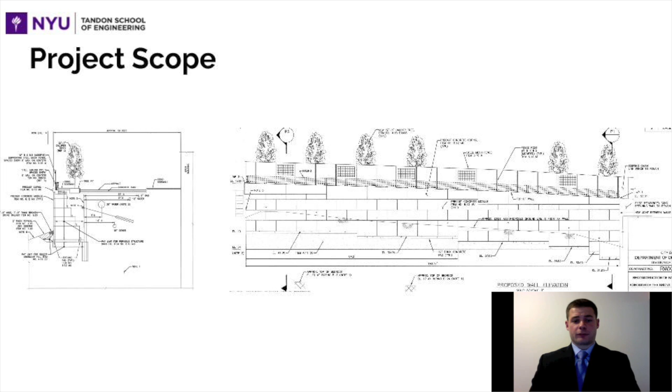To introduce our risk management plan, we'll be starting off with the project scope, led by Kevin, and the cost estimate and schedule, led by me, Gabriela. The project scope is to reconstruct a 148-foot retaining wall with an elevation ranging in height from roughly 10 foot to 18 foot. There will also be some construction of a water main, street lighting, and roadway and traffic work.

The location of the retaining wall will be between Bailey Avenue and Fort Independence Street in the borough of the Bronx, New York. The limits of the project are from Bailey Place, Bailey Avenue, and West 234th Street to approximately 150 feet north. The project is designed in a staged construction area to minimize disruption to existing utilities.

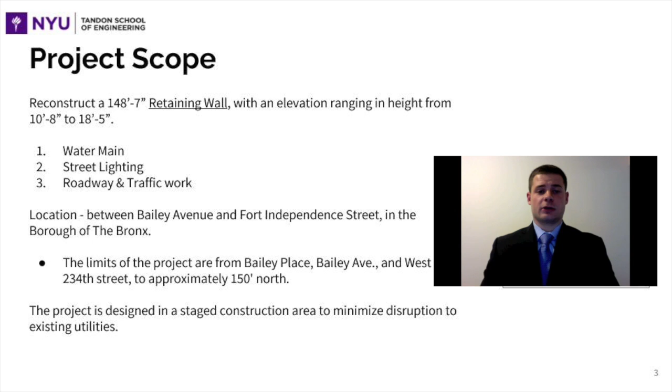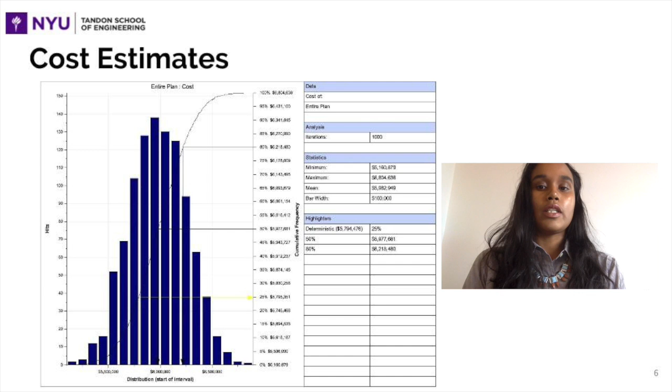This histogram shows the cost of the entire project after each iteration of risk analysis performed by the program, resulting in a few values of note. There is an 80% chance of the project being completed below $6.218 million, about 7% more than the design estimate. The program also generated a 50% chance of completing the project below $5.978 million, about 3% more than the design estimate.

The project start date is March 28, 2016, and is scheduled to complete on April 13, 2018. The project's total duration is initially computed to be 535 days, or approximately 18 months. Due to one task, tree planting and related work, having a start date fixed to the beginning of spring, the actual span of the project would be 746 days, or about 24 months. This also causes all other tasks to have float leading up to this one, and makes it the critical path.

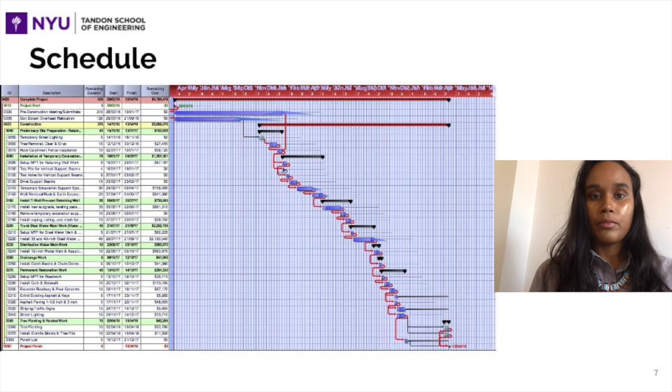This diagram also presents some notable results. There is an 80% chance of the project being completed under 774 days, about 4% more than estimated. The program also generated a 50% chance of the project being completed in under 753 days, about 1% more than estimated.

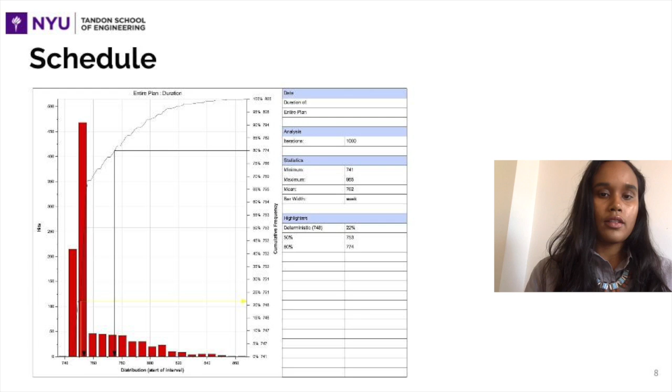The next area we're going to talk about is the risk management procedure. Within the risk management procedure, it consists of the risk identification, risk analysis, qualitative risk analysis, and quantitative risk analysis. Thanks, Kevin. The first step in the risk management procedure, risk identification, allows us as risk analysts to proactively take a look at the risks involved in the project.

Influence diagrams are a visual representation between our project's risks and allow us to get a better understanding of the relationship between the risks. For the purposes of our project, we separated our influence diagrams into 4 outcomes: change orders, construction damage, compromising of worker safety, and scheduling construction delays. Here, we'll take a look at one of our 4 influence diagrams, the diagram representing construction damage. It can be seen that there are many risks which could lead to the possibility of construction damage.

The association between the risks is very much up to personal judgment, but our group determined that our diagram would represent 14 uncertainties, seen as red ellipses, and 1 decision event, represented by the green rectangle, which have the potential to cause construction damage, which is seen in the blue diamond.

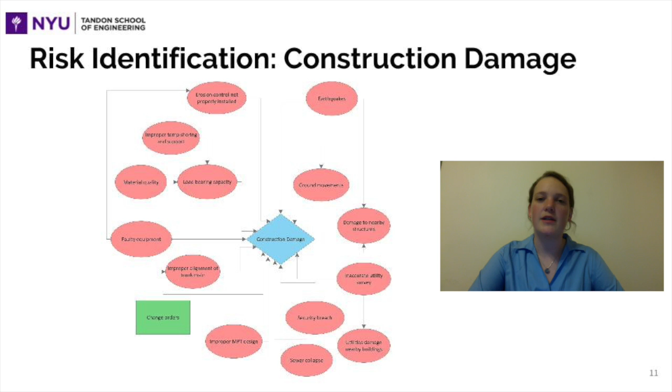Any given risk can also impact the outcome in multiple ways. Using this diagram as an example, we see that the faulty equipment located midway on the left-hand side can directly cause construction damage, or it can indirectly cause construction damage by leading to improper alignment of the prefabricated trunk main. Thank you, Molly. The risk analysis that we performed was both qualitative and quantitative.

Qualitative risk analysis is a project management technique that deals with discovering the probability of a risk event occurring and the impact the risk will have if it does occur, using a variety of subjective and judgmental techniques to rank and prioritize the risks.

Each risk has been assigned a qualitative probabilistic value that it is going to occur, and also a qualitative value for the project impact on its cost, scope, schedule, and performance. The analysis where the risks are classified into very low, low, medium, high, and very high scales.

Risk register is used to calculate the risk score, and quantitatively analyzing the risk associated with the project involved estimating the risk in terms of frequency or probability of a loss to make the appropriate decisions. In using approach, exposure assessment was critical. Each hazard had to be quantified in terms of both duration and cost.

Using the Primavera software, we developed a risk register as a way of performing our qualitative risk analysis. This allowed us to get a high-level understanding of our risks and impacts, as well as see the links between the risks and their corresponding schedule, tasks, and costs. Risks were evaluated based on probability, scheduling, cost, and performance, all of which are factored into the score which is associated with the risk.

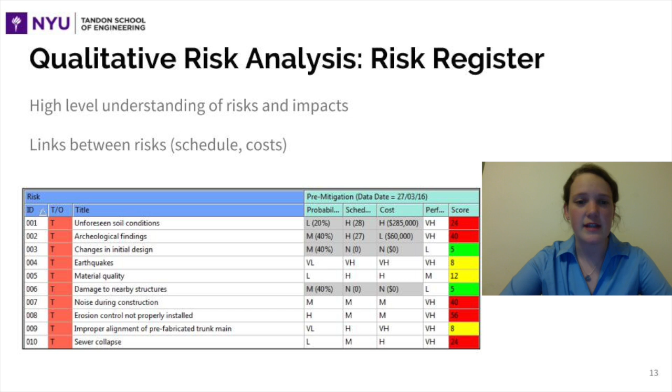We see here a portion of our risk register which shows our assessment of the first 10 of our risks. Some of the values assigned to the risk have numerical values shown as percentages, and these are risks for which we've performed further quantitative risk analysis and will be discussed later in the presentation.

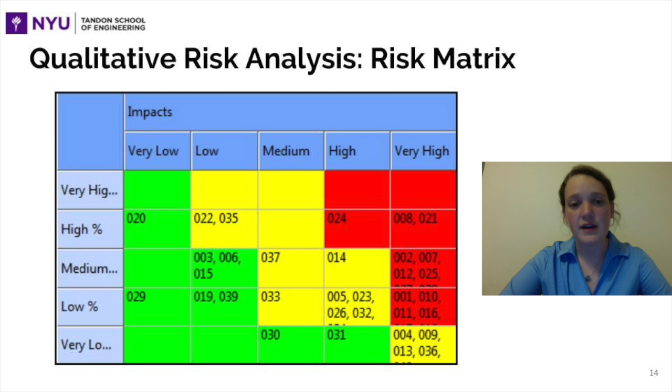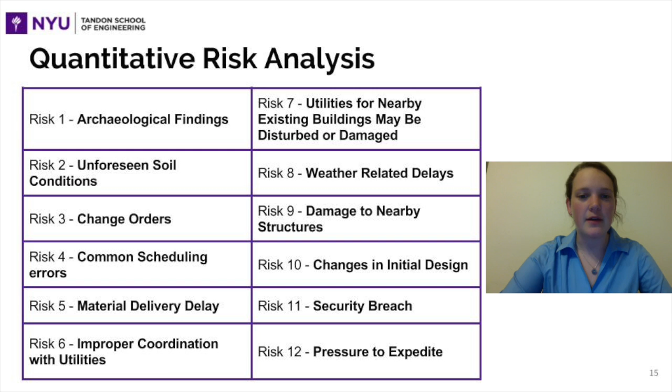Here we can see our generated risk matrix, which shows the relationship between risks and tasks and their corresponding impacts. Our report only involved linking 12 of the chosen risks to the appropriate schedule tasks, but it can be seen that the risks varied in both impact level and probability of occurring. We will now go into further detail on the quantitative analysis performed on 12 of our selected risks. Each member of Team ALOW will describe 3 risks, beginning with Gabriella.

Planning for archaeological findings would necessitate being aware of governing regulations that preside the project site. Initial studies performed beforehand incorporate regional and historical and site-specific information with the analysis of historic maps, determining whether or not any significant buried historic remains may be uncovered during the project. The mitigation response chosen for this risk was accept, since archaeological resource regulations must be followed if they apply to the project site. The investigations mentioned beforehand may incur a cost of approximately $20,000.

Monitoring of this risk can be done through educating construction laborers and supervisors on key indicators to be aware of during excavation that may be of archaeological importance. Controlling this risk once it's set in motion by encountering archaeological resources must be done by hiring archaeologists to perform the necessary monitoring, fieldwork, and testing. Costs incurred by this type of risk are assumed to be $60,000 with a scheduling addition of about 27 days.

Reporting procedures during mitigation are also determined by regulating agencies and should be performed by archaeologists hired. Mitigation is typically a full archaeological excavation of the project area, which occurs only when all the other steps indicate that a major archaeologically significant site remains beneath the project area.

Soil conditions not captured by exploration performed during the design phase substantially impact the project. Our main component, the retaining wall, could suffer substantial design changes. Sewers and water mains may need to be designed differently as well. This could be changes in grading or the foundation of the pipes themselves. Excavations may have to be adapted to conform to the new soil conditions.

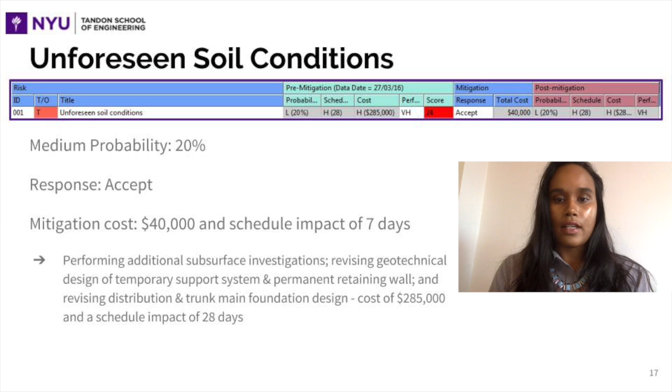Revising distribution main and trunk main foundation design would cost about $10,000, since many design standards exist for these type of foundations, which are created by governing agencies, so extensive funds would not be needed for this response type. The actual project costs are expected to be quite significant, about $285,000 in additional costs to the project, and an additional 28 days were expected to be scheduled.

Out-of-scope work, which in turn produces change orders, may cause alterations to the budget, timeline, or both. Planning for this risk warranted accept-type responses, since change orders are a fact of virtually all large-scale projects. Some change orders can be avoided, but the chances of not encountering a single change order on this sort of project is almost zero. Construction managers should be aware of the process this entails, and proper execution of this task.

Monitoring for this risk requires extensive experience, coupled with thorough knowledge of the project and construction procedures on behalf of construction supervisors. Although change orders cannot be avoided, this may allow for some to be circumvented. The controlling mitigation action assumed for change order processes typically do not incur devastating costs. $10,000 and 7 days were allocated for this measure. However, change orders can affect any given task within the project, so a high cost was associated with its occurrence, $255,000. Schedule implications are of approximately 28 days.

Common scheduling errors can be caused due to many reasons, such as errors in technical logics, overlooking procurement of critical materials, or sometimes failure to consider physical, weather, or resource constraints. Sometimes it could also happen due to unrealistic productivity or durations. And keeping that in mind, we have given a 40% probability of this risk to happen. And the response we chose to go with is reducing the risk.

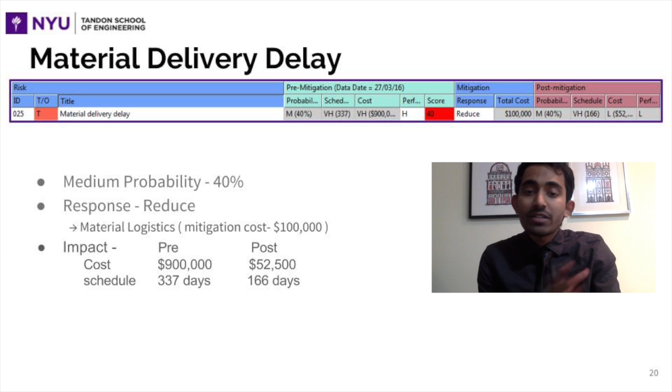This can be achieved by applying the mitigation strategy of material logistics, a shipment tracking based approach to provide inventory transparency, and a proactive material delivery approach for timely material availability. This mitigation would require a mitigation cost of $100,000, and this mitigation would reduce the risk impact on cost from $900,000 to $52,500. And the schedule impact can be reduced from 337 days to 166 days.

Improper coordination with utilities. Utility delays are one of the primary reasons for increased costs and schedule delays during the construction phase of a project. Although there is a low probability for this risk to happen, if it happens, there is a very high impact on both the schedule and cost of the project. The risk response is to reduce the risk.

This can be achieved by hiring an expert consultant who has a very good knowledge on dealing with the utility works. For this mitigation strategy, the mitigation cost is $200,000. This mitigation would reduce the cost impact from $964,000 to $82,400. And the schedule impact due to this risk can be reduced from 284 days to 122 days.

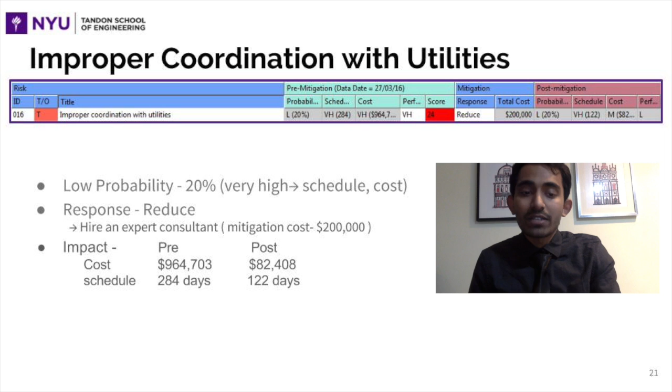Thank you, Rajesh. The first risk that I'm going to talk about is utilities for nearby existing buildings may be disturbed or damaged. Utilities such as electrical lines, sewer lines, pipes, conduits, anything that is below or above grade, if it's not properly located during pre-construction field walkthroughs or surveys, they could be damaged or disturbed in any way.

So proper field surveys before construction and utilizing field markers to allow everyone to know where these utilities are below grade helps make everyone aware. Also, proper site meetings and coordination meetings will keep everyone on the same page, especially with utilities above ground having proper supports. Just an extra support goes a long way during excavation, which might cause a ground movement or something.

Having extra materials on site in case a pipeline or a conduit is disturbed or damaged will save a lot of time and won't severely affect the schedule. Also, having readily available contractors there to do the work that won't take away from the actual work on the project is a huge help.

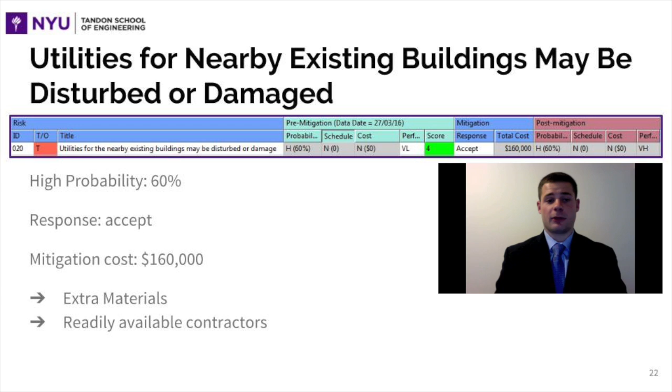The next risk I'm going to talk about is weather-related delays. Bad and unpredictable weather can cause delays to projects. Weather is the most unpredictable risk when it comes to a project. The weather could be nice one day, and then within the next couple of hours, the weather could be very lousy, and it's so unpredictable. You don't know how the weather's going to be that day. So this is why there's such high probability for this risk.

Ways to mitigate it and avoid it: having extra float within the schedule throughout the year to allow yourself time and ways to adjust if one day you know it's going to be bad weather, well, then you could have another task that you could complete. Also, having extra money in case bad weather does occur. Say you have a crane on site one day and you need the crane 2 more days, so you're paying an extra day or two for the crane. Having money in the budget will allow for this.

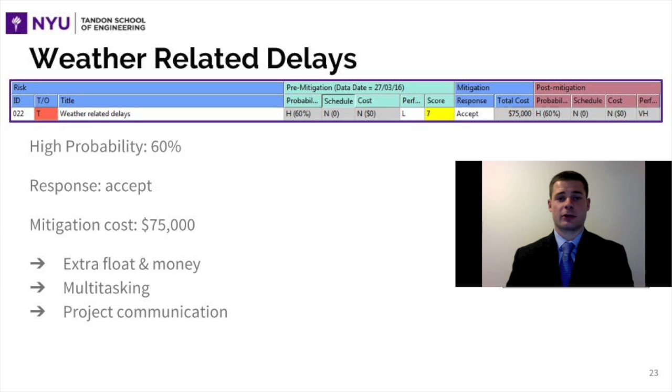Also, multitasking. Like I said before, if you can't complete one task this day, have another task lined up right behind it so that it won't cause any delay to the schedule. This is a risk that we will accept, and constant communication among all parties every day when you know the weather is going to be bad will help to avoid a lot of problems, and constant review with the project team to make sure that you have another task that can be completed if your scheduled task for that day cannot be.

The last risk that I'm going to talk about is damage to nearby structures. Structures that are close by can be damaged during construction. Construction activities such as jackhammering or excavation, which would cause a fault in the ground, can cause buildings nearby to crack, or something bad can happen. So the probability for this is medium because we provide all the support to make sure that this does not occur.

So some things that we could do ahead of time are proper shoring when you're excavating to make sure there are no landslides, or especially with a retaining wall, nothing collapses and causes any movement in the ground which could fracture a piece of the building nearby. Extra supports and bracing is just more support, and it helps to strengthen the structure that you're working on. So for this retaining wall, proper shoring and bracing really will help strengthen it to avoid these damages to the nearby structures. If we do have problems, we will transfer this risk to insurance companies who will deal with this.

Other ways we can deal with it is have extra materials on site so we could fix this structure as best as we can until the insurance companies deal with it down the road. And also constant communication, allowing the structures or buildings nearby to know when we are doing excavation so they know to be aware, really for their safety. Alright, thank you. Those are my 3 risks, and Molly is up next to discuss her 3 risks.

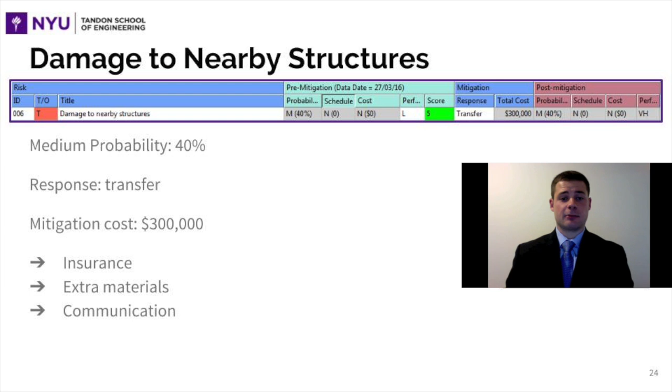Wrapping up on our chosen risks, I'll begin with changes in initial design. A design change can occur for many different reasons, often as a result of another risk occurring. Because of varying probability of the risks which could lead to a change in design and our experience in past projects, we've given a medium probability of 40% to this risk. The response for this type of risk was classified as accept because any changes to the design cannot be avoided or transferred, and they must be incorporated into the project by the team.

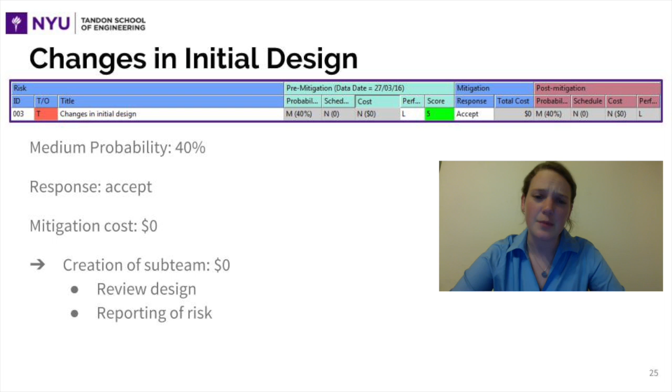Our mitigation strategy for this risk involves the creation of a sub-team, which will review the project design and make sure it meets all of the project requirements, with the hope that any shortcomings will be recognized early on and will lessen the likelihood the design needs to be changed. The team will also handle any reporting of the risks, as this would be included in the review and documentation of the change of the design. This team will consist of project staff and will not add any significant cost to our project.

Moving on to the risk of security breach, which is given a high probability of 60%. The reason for this high probability is due to our site's location in a very urban area near roadways and with a heavy volume of people near the site on a daily basis. As a precaution for the risk of security breach, fencing can be installed around the project site to deter people from entering. Additionally, lighting can be installed to make the area more visible and less appealing to those who would wish to access the site illegally.

The mitigation response for this risk is that of accept, because once the site has been broken into, the risk will have occurred and there's really no way of lessening that fact. We can, however, set up mitigation actions such as hiring on-site security to monitor the area, as well as installing additional fencing. These actions would apply to the construction phase of the project, and the total cost is estimated to be $255,000.

The last risk I will address is the risk that there is pressure to expedite the project. This pressure can be from the project owner, from government, or from other authorities, and we've given it a medium probability of 40% based on the rate of seeing this occur in past projects. A response of accept is because often the pressure is occurring from a higher authority and is not something which can be challenged, meaning it must be carried out and accepted.

Luckily, we can set up mitigation actions to take this risk into consideration. We've budgeted $200,000 for the hiring of additional staff to join the project in order to accommodate the increased workload and to manage this expedited project timeline. Additionally, the creation of a sub-team from existing project team members will serve as a communication tool to keep the higher authorities who are putting on this pressure well informed of the progress, and will keep them updated on the project status.

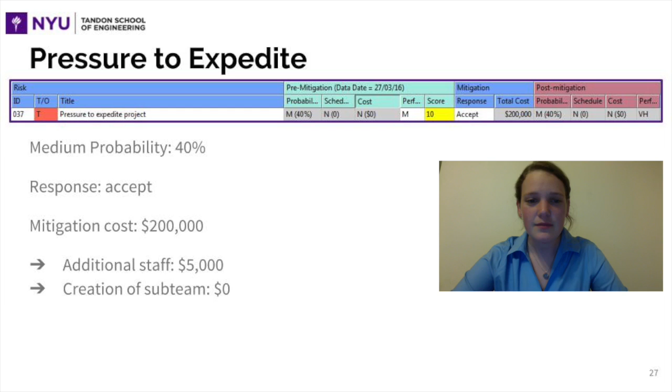That concludes the analysis of our 12 focus risks. I'll now hand things over to Rajesh, who will cover the risk report generation, including a comparison of our pre- and post-mitigated results.

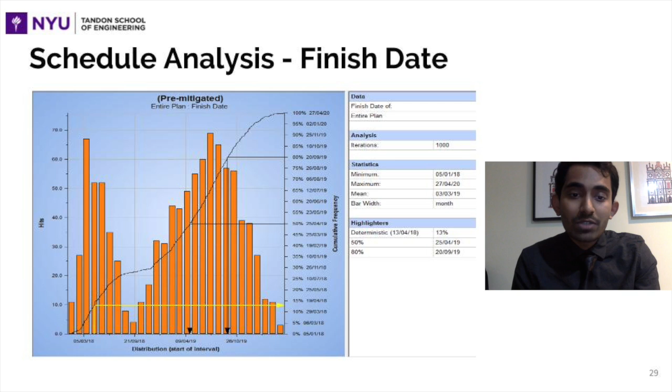In this schedule analysis, you can see that if we go in a deterministic way, that is without giving the uncertainty values for the project, you can only be 13% confident that you can finish the project by 13th of April 2018. But after you input all the uncertainty values, you can be 80% confident that you can finish the project by 20th of September 2019.

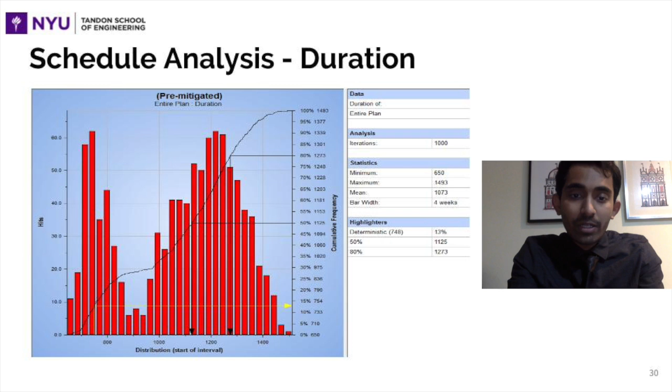In terms of duration, with all the risks involved in the project, you can only be 13% confident that you can finish this project in a duration of 748 days, and you can be 80% confident that you can finish this project in a duration of 1273 days. In terms of cost, with all the risks involved, you can only be 3% confident that you can finish this project with a $5.7 million budget, and you can be 80% confident that you can finish this project with a $7.7 million budget.

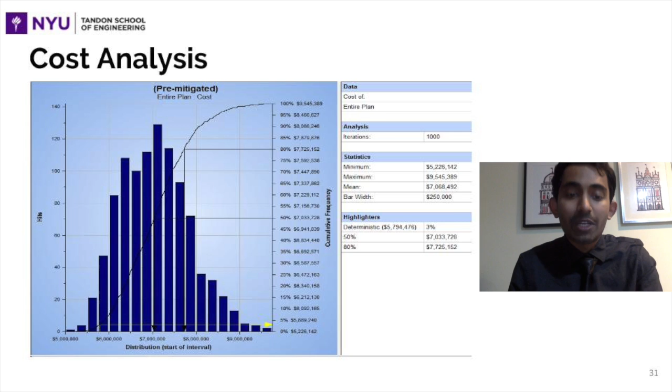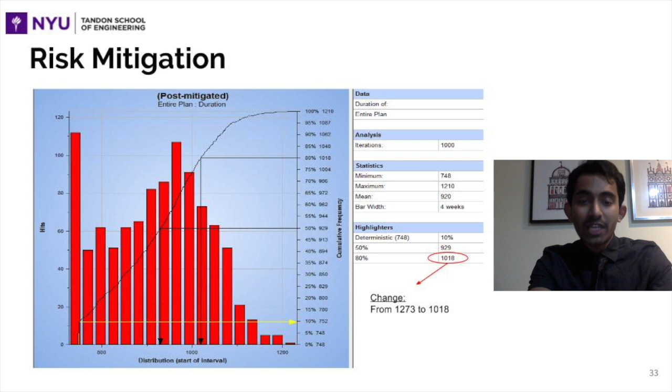After the risks are mitigated, you can be 80% confident that you can finish the project by 8th of January 2019. Before the mitigation, the finish date was 20th of September 2019. After the risks are mitigated, there is an 80% chance to complete this project in 1018 days. The pre-mitigated P80 duration was 1273, which upon mitigation was brought down to 1018 days.

You can see that there is an 80% chance that this project can be completed with a budget of $8 million. Before the mitigation, it was $7.7 million. Although there is a difference of $300,000 between the P80s of pre-mitigation and post-mitigation, without having the risk mitigation done, the owner will have no idea how the cash flows will vary during the construction of the project.